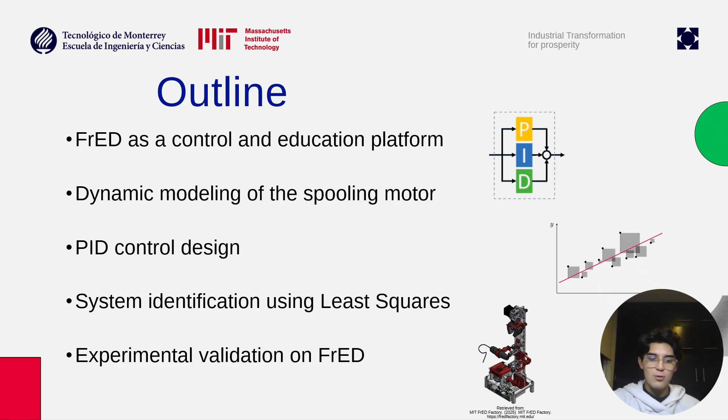So first, let's begin with the introduction section. We're going to revisit some of the topics that we've talked about in the last few hours in the workshop given by my colleague Adriana. So yeah, first we need to ask this question: why is it that we use FrED for learning control? Why is it useful for control?

So FrED, as you may have noticed from this whole summit, is a really special and really creative way of solving a problem, and this is a fiber extrusion device, also known as FrED. FrED is a modular scale manufacturing platform designed to mimic key parts of the optical fiber production. It combines mechanical actuation, thermal processing, sensing, and digital control.

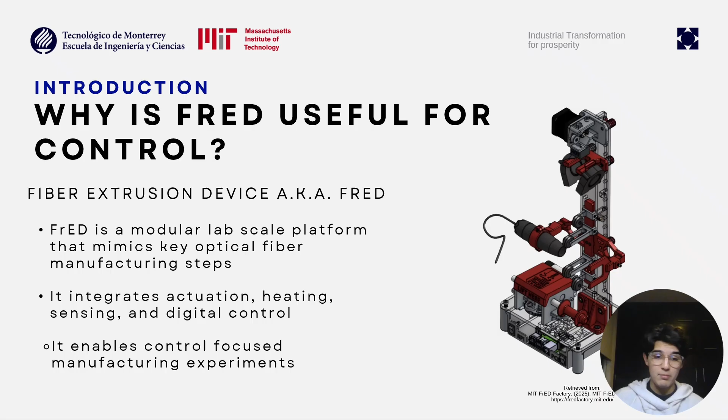This setup lets us, as students or as researchers, study manufacturing processes from a control engineering perspective and build experiments around FrED. We can experiment with the real physical tool instead of just simulating or modeling, in a safe environment without the risk of messing up a large machine that costs a lot of money. It's not only limited to fiber extrusion, but every other machine that implements control in manufacturing.

So let's begin with FrED subsystems. We're going to talk about what composes FrED. Each subsystem has a specific task. The most important thing is that they don't work independently. Instead, they form a coupled system where changing one part directly affects the other.

Starting from the top, we have the extrusion subsystem, which is responsible for heating the polymer, in this case the glue, and feeding the material into the system. Right after that comes the cooling system, which regulates how quickly the material solidifies. And the cooling rate is really important because it influences the physical properties of the fiber.

And next we have the measuring device, which is a high resolution camera that feeds the images into a computer. This computer is charged with a computer vision algorithm to estimate the fiber diameter in real time.

Then we have the spooler subsystem, which uses a DC motor with a gearbox to pull and wind the fiber. By changing the spooling speed, we change the tension applied to the fiber, which directly affects the final diameter. We'll get to that, but this is the reason why we will be implementing a control together in this motor, specifically this subsystem.

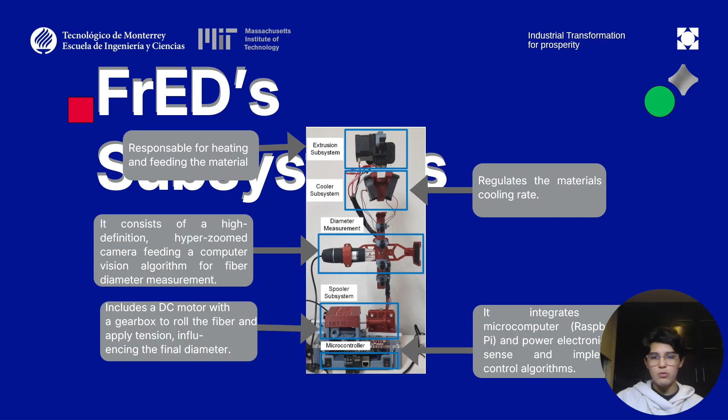Because all of these subsystems interact dynamically, FrED is behaving very much like a real industrial manufacturing process, where multiple physical processes are embedded together, coupled together, and must be controlled simultaneously to ensure a final product quality.

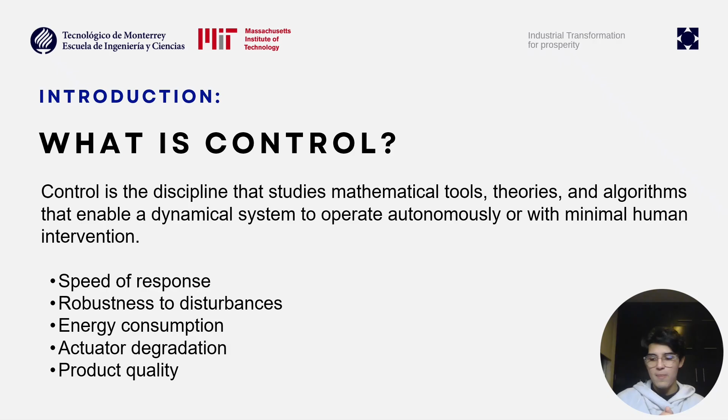All right, now let's formally define what we are talking about. Control is a discipline that studies mathematical tools, theories, and algorithms that enable dynamical systems to operate autonomously or with minimal human intervention. This is one of the most used definitions, and in my opinion, one of the most complete definitions of control, because in real engineering systems, especially in manufacturing, the objectives of control go well beyond just simply reaching a desired value. It's about balancing requirements that compete with each other.

The speed of response, we look for robustness against disturbances. We also want to optimize energy consumption, make our actuators last as long as we possibly can. That's why we control the actuator degradation by taking care of it, and we also ensure product quality. That's why control is not just about reaching a value. It's about making the system perform optimally under real-world constraints.

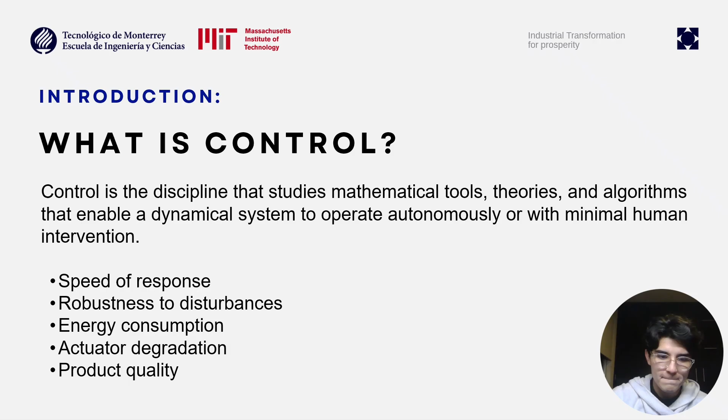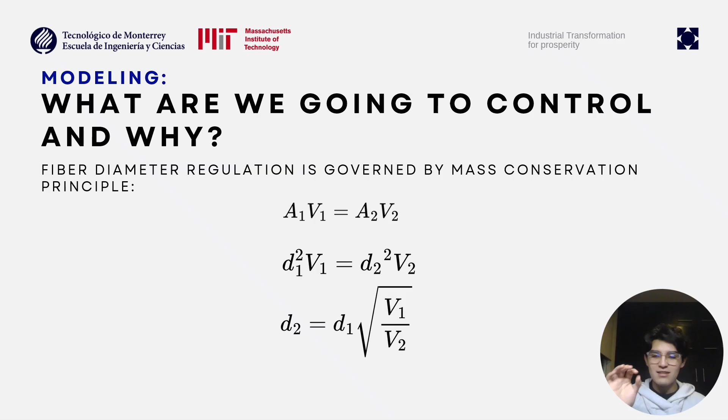And in the concrete case of FrED, control guarantees a stable spooling speed, which, as we've stated before, ensures a constant fiber diameter. That's why we will control this motor today. By regulating variables such as motor speed and heat power, the control system keeps the process stable despite disturbances or variations in maybe material conditions.

This obviously ensures that the fiber is produced with a consistent diameter and quality, which is critical for optical purposes, for the fiber to transmit data accurately, and this makes the manufacturing process robust.

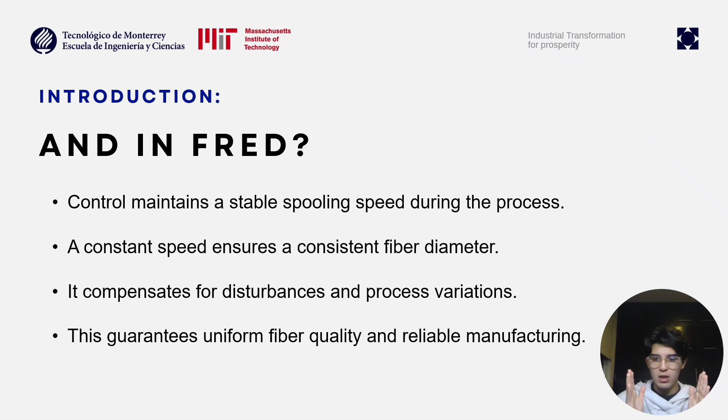Now let's start with the history of control systems. So the first automatic control system was developed over 2000 years ago. The first control device on record is thought to be the ancient water clock, the Clepsydra, in Alexandria, Egypt, around the 3rd century before Christ.

How did this system work? Well, it allowed water to flow out of a container through a hole at a roughly constant rate, and the level of water indicated how much time had passed. However, this system was considered to be an open loop system because it had no feedback mechanism. This means if the flow rate changed because of the pressure or temperature, the system would not adjust or correct itself.

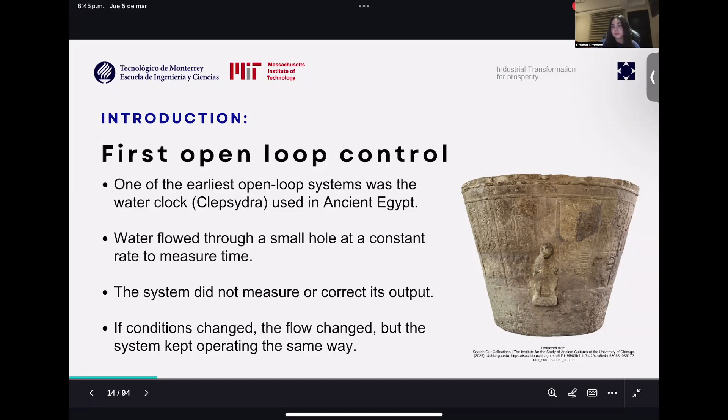Now let's see a video. What did you observe in the video? What is that?

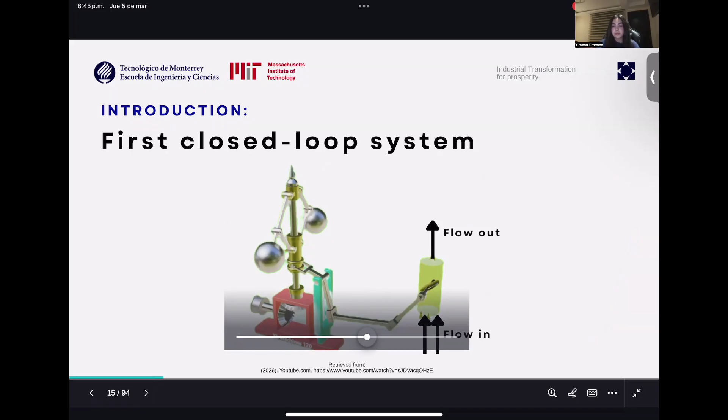So this is the first closed loop system. It was built during the Industrial Revolution in the 18th century. And during this time, steam engines were the primary power source in factories, but they had a huge practical problem. Every time the load varied, the engine's rotational speed changed as well. Those fluctuations could reduce efficiency, damage the machinery, or even cause dangerous failures.

So, in order to solve this, the Watt's centrifugal governor was invented, and this machine could actually react to the changes in the engine's rotational speed, changes that human operators were too slow to handle.

But how did it work? As we observed from the video, there's a motor, and the motor rotates. Then there's an axis that rotates as well. And in this axis, there are two spheres. When the motor's speed increases, the spheres' separation will start to increase. The spheres will start separating.

And this separation actually causes the valve to move. The movement in the valve based on the measured speed allowed the governor to maintain a stable operation without the need of human intervention because it allowed it to release steam. And this machine actually introduced a core idea that is used in modern control, which is feedback. And feedback is a way of correcting the input by comparing the desired output with the actual output.

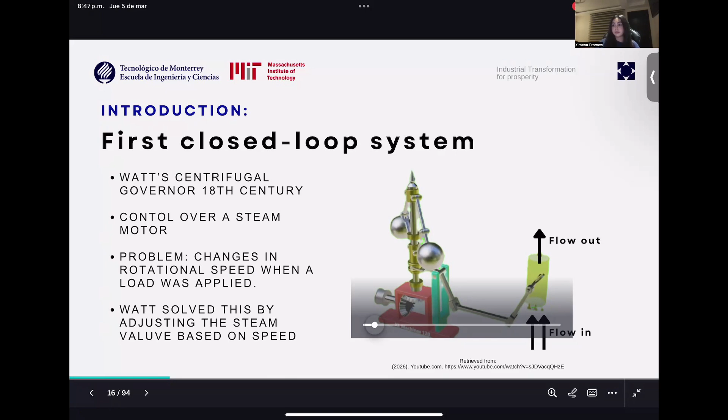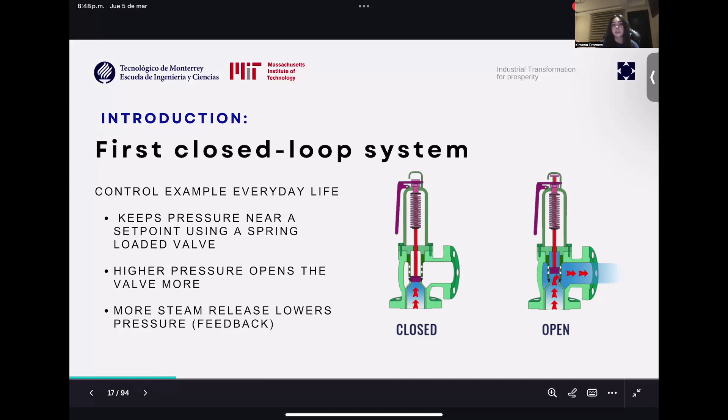Let's look at a more familiar example. What about the pressure valve on a pressure cooker? So the pressure cooker keeps the pressure near a set point using a spring-loaded valve. So as the pressure increases, the valve opens more, releases the steam, and as a result, the pressure drops. This is feedback in action.

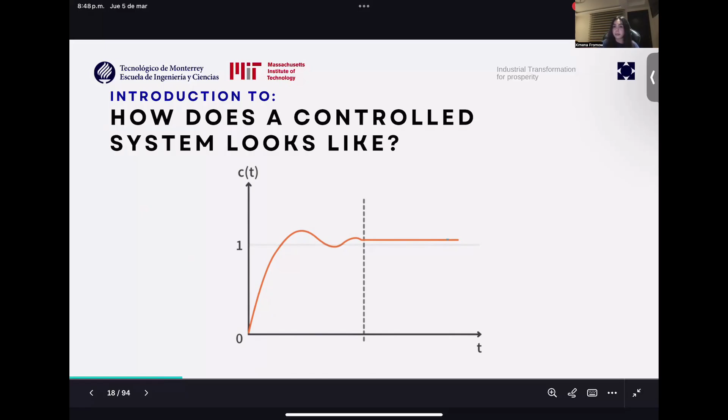Now, here is a recap from the previous workshop. Who can come to the board and identify the key points on this characteristic control graph? So first, we can observe that there is a desired output, which, as the name suggests, is what we actually want to obtain. Then there is the actual output, and as the name suggests again, is what we got.

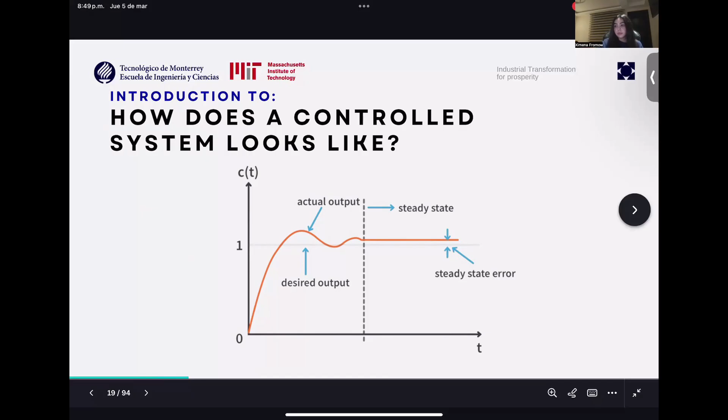Then there's a steady state, the point in which the system will stabilize, and then there's the steady state error, which is the gap between the value of the output when the system was stabilized and the desired output. We can observe as well rise time. And the rise time is the time it takes the system to get close to the desired output.

There's also the peak time. And the peak time is the time it takes the system to get to the highest point in the graph. So in this case, it is after the overshoot. But what is the overshoot? The overshoot is how much the system will surpass the desired output. So it's the gap that is created. And that's it for now.

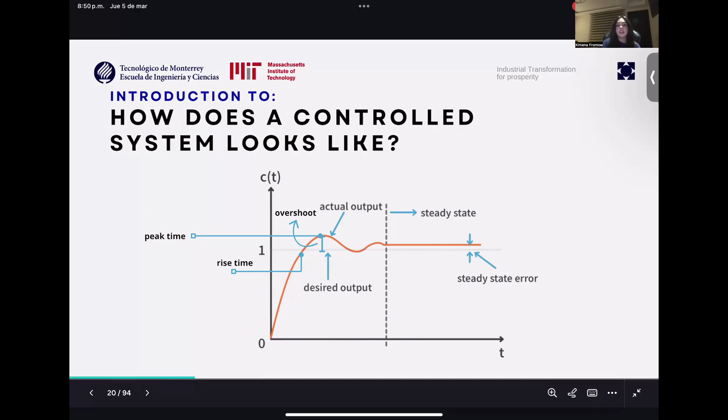First, what exactly is damping? So damping is a dissipation of energy in an oscillating system. A good example to visualize this is when you pull a spring and then release it. If there is no damping, the spring will continue to oscillate forever. But with damping, the spring will eventually come to a stop. That is damping.

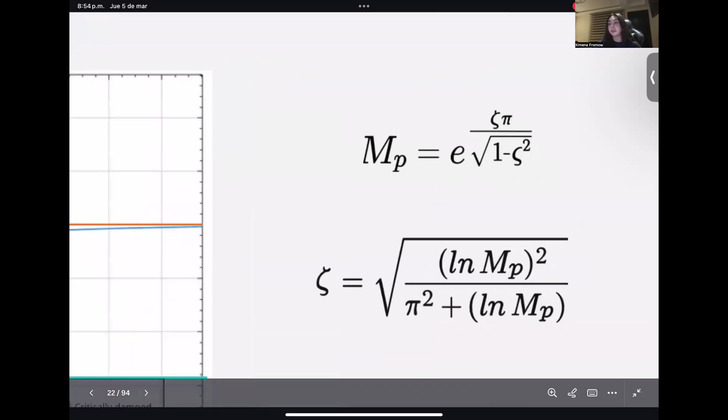Then let's see the equations. So we have Mp. Mp is the maximum overshoot. And as we can see, this equation is only based on zeta, so it is controlled by zeta. But what is zeta? Zeta is a silly looking Greek letter, and this Greek letter is actually the damping ratio. So the damping ratio is like the division, the comparison of the...

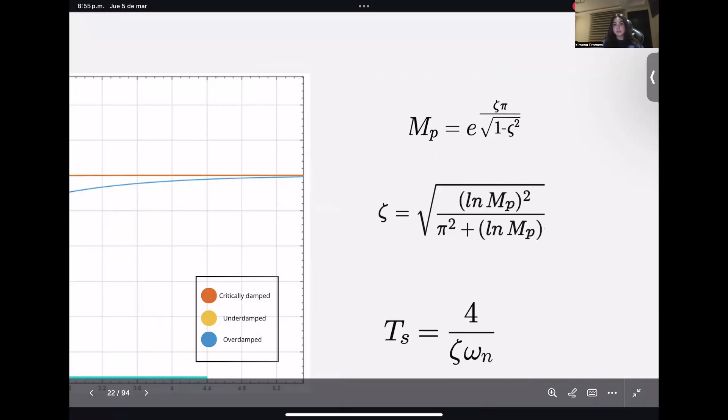Now, what about this image? We can observe three different control responses. Which one is overdamped, which one is critically damped, and which one is underdamped?

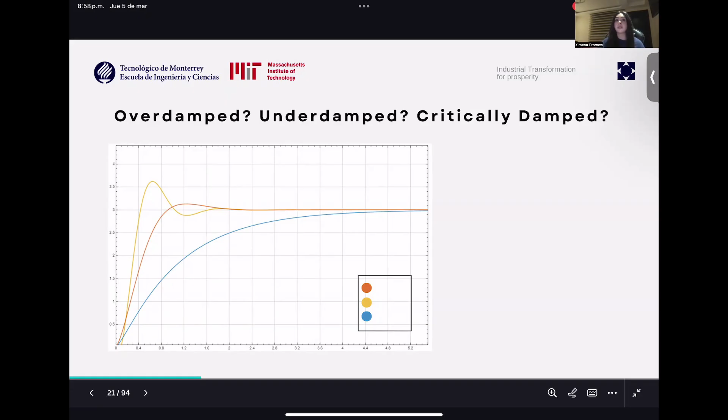First, we need to define what is damping. Damping is the dissipation of energy in an oscillating system. A good example is a spring. If you take a spring, pull it and then release it, without damping, the spring will continue to oscillate forever. But with damping, it will eventually come to a stop. That is damping.

Now that we know that, we can start looking into more important concepts repeated throughout this workshop. The overshoot occurs when the system exceeds the set point before settling. It is clearly visible in the underdamped, the yellow one. It's caused by aggressive control action or low damping. As the name suggests, underdamping has low damping, and this response is characterized by being really quick, but having an overshoot and oscillating before actually settling.

So what are oscillations? Oscillations happen when the controller makes the output dance back and forth across the reference value without ever settling on it.

Now that we know what underdamp is, we can get what overdamp is. Overdamp is the exact opposite of underdamp. Overdamp means it's a system with a lot of damping, highly damped. In this type of system, the response will be slower, but the system will be more stable. The response will be more stable. There will be no overshoot and no oscillations.

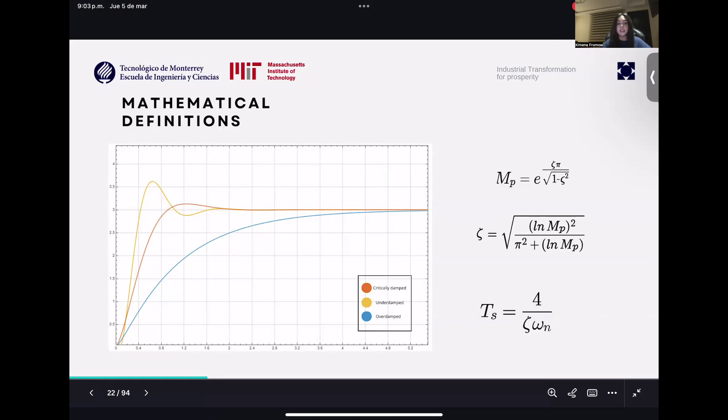Here's another key concept you can use to identify which response your system will have. If zeta is smaller than 1, you will have an underdamped system, characterized by a lot of oscillation and overshoot, but a quick response. If zeta is equal to 1, you will have the critical damp, the optimal, ideal type of system. Finally, if zeta is bigger than 1, you have an overdamp system, which is slow. It has a slow response, but is way more stable than the underdamp.

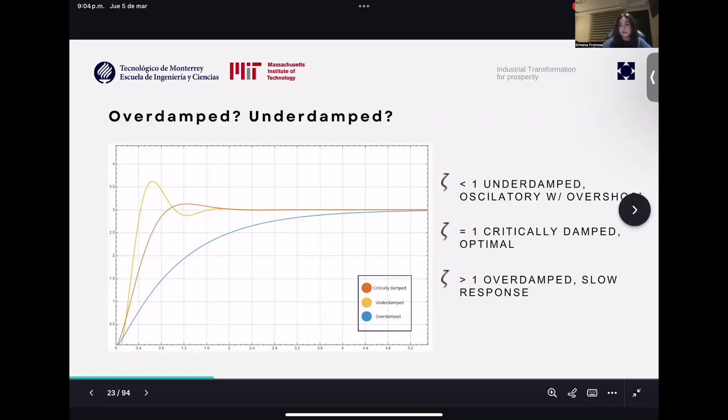But why are they important? Why do I need to know which type of response, which type of system I have? Well, in manufacturing applications such as FrED, excessive overshoot may lead to diameter fluctuations, while excessive damping may slow the correction of disturbances. Therefore, this type of second order analysis is very important to balance performance and robustness.

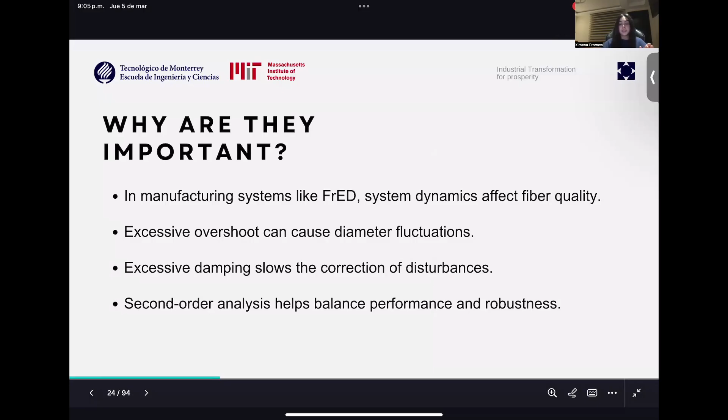So now that we know this, we'll move on to implementing the first code we have in MATLAB. Please start by opening MATLAB.

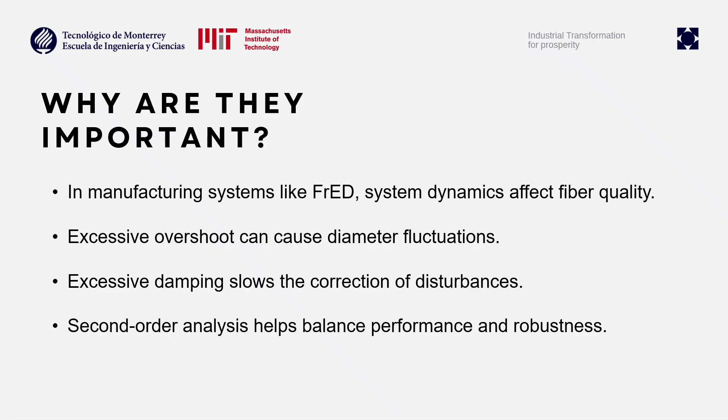Now let's briefly talk about different control techniques. Some of the most common closed loop control techniques are the on-off control, which is the simplest. It fully switches the actuator on and off depending on whether the error is positive or negative, like the thermostat in your home. Fuzzy logic control uses linguistic rules instead of precise equations to control systems with uncertainty or nonlinear behavior.

Adaptive control automatically adjusts its parameters in real time to maintain performance when the dynamics of the system change a lot. And finally, model predictive control predicts the future system behavior using a model and optimizes control actions over time.

And the star of today's show, the PID controller. It's a linear feedback law composed of three actions. Proportional action, which reacts directly to the current error. If you have a large error, you will have a large response to it.

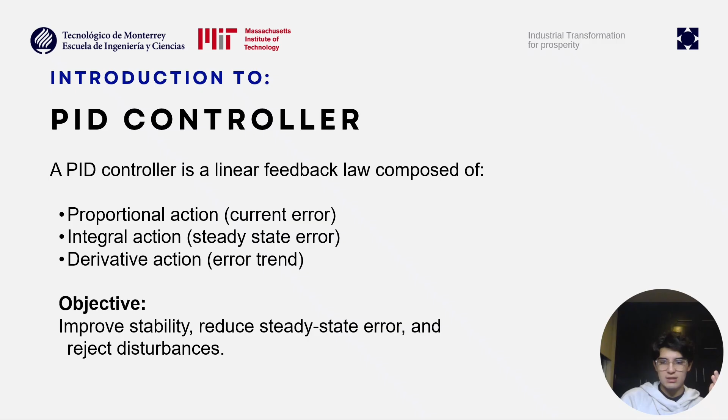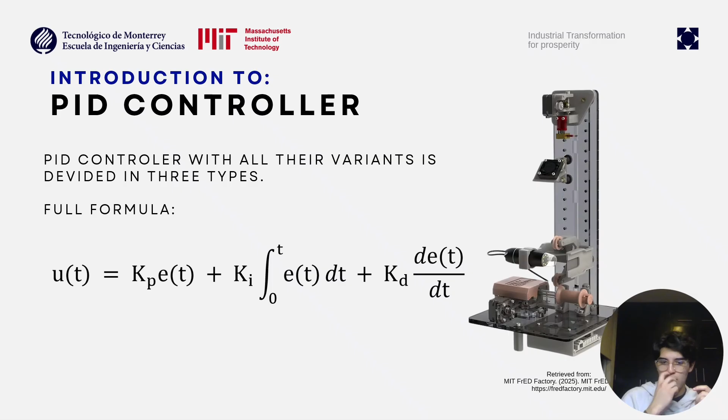Here we see the complete mathematical representation of the PID controller. It comes in three variants depending on which combination of actions is used. It could be P, PI, PD in some cases, or fully PID, which is the combination of the three: the proportional, integral, and derivative part.

So just a reminder of the table that we examined before with Adrian, and a reminder of what I said before: the proportional acts on the current error, the integral on the steady state error, and the derivative upon the error's trend.

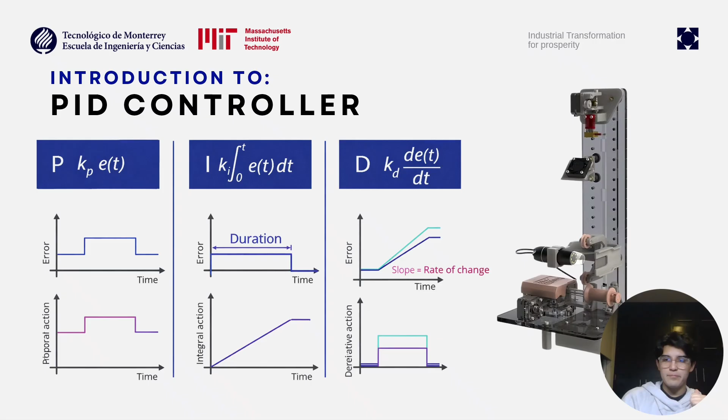When we represent the PID in the Laplace domain, we get a transfer function, which we will get to in a few slides. This representation allows us to apply powerful mathematical tools for designing and analyzing the closed-loop system we will be implementing on our motor.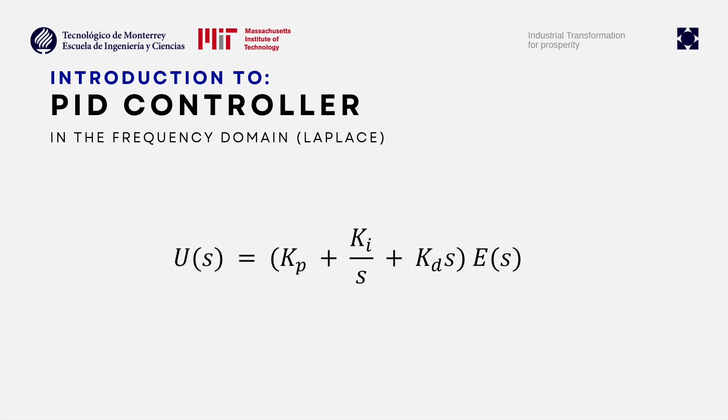Before applying our controller to the motor, we need to understand how the controller actually influences the physical system. In control theory, we compute a control signal called U of T. However, this signal is only a mathematical command. To transform this command into real electrical energy delivered to the motor, we rely on power electronics.

Power electronics is a field of electrical engineering concerned with the conversion, control, and efficient regulation of electrical power using semiconductor switching devices. In many systems, the available electrical power cannot be applied directly to the load. Instead, it must be converted, conditioned, and regulated. This is done through different types of power electronic converters.

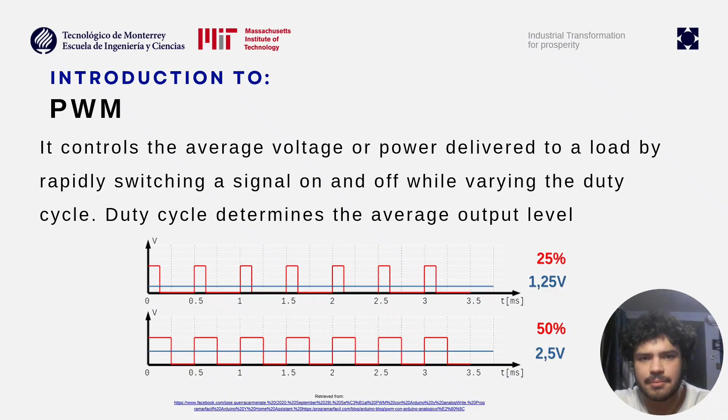PID controller pros and cons. Like any tool, like anything in the world, PID has its strengths and its weaknesses.

Some of the advantages are that it's simple and intuitive, easy to understand, implement, and tune compared to advanced methods. It is widely proven in industry. It works reliably for a wide range of processes, from manufacturing fiber optics to even drones—everything that could require control, PID might work with it. It's the most used controller in the industry, and it's really easy to tune, as I've said before.

Some of the disadvantages are that it has no explicit prediction. It only reacts to errors because it's a reactive control—something needs to happen for the controller to react. Some definitions say the derivative part could be seen as a predictor of the future, but that is actually wrong. You won't find that definition, to the best of my knowledge, in any serious control book. So we won't even say that it predicts the future. And some poorly chosen gains can cause overshoot, oscillations, and instability.

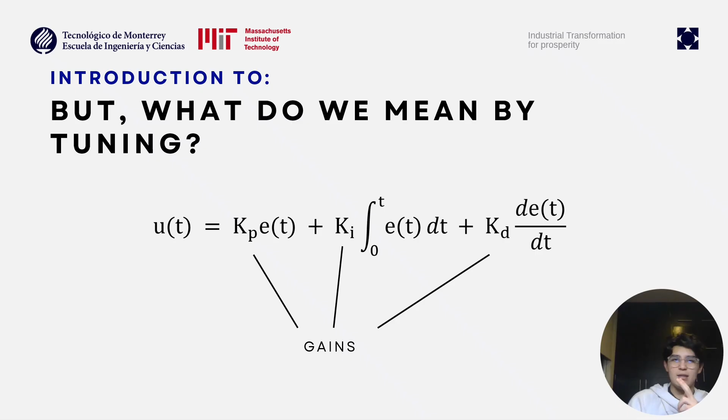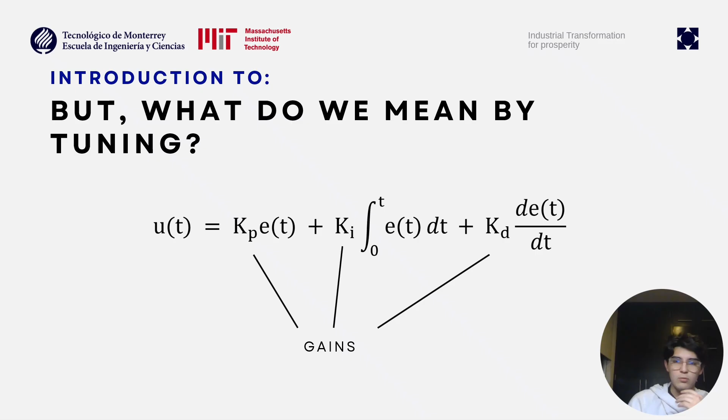There are a wide variety of tuning methods, and we are going to present you with an analytical one. Just keep in mind that the goal of the system is to respond quickly, accurately, and stably to any given reference. Proper tuning balances performance metrics like overshoot, settling time, and steady state error, according to the application requirements.

We'll wait for that to happen, and first we will try setting the gains in the FrED. So some of you give me a value—I ask for a PID gain estimation from the audience, just to show how the FrED will respond to these random values given by the public. And we'll get to the modeling part, discussed by my colleague.

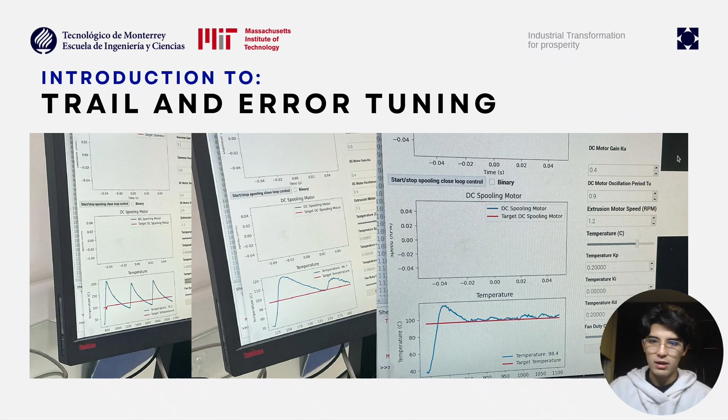Now, what is a model? A model is an abstraction constructed to answer specific engineering questions. In manufacturing, there are common modeling objectives such as prediction, where engineers try to forecast process behaviors under changes in inputs, disturbances, or set points. Then there's analysis, where we study stability, sensitivity, and performance limitations given by physics.

Then we have control design, where we design feedback control laws to regulate variables and product quality. Finally, we have optimization, where we trade off quality and energy consumption under certain constraints.

But why is it important? Why are we going to model? We seek a model that is adequate for a defined purpose. In control, model adequacy typically means capturing dominant dynamics in the frequency band relevant to regulation and tracking, with an explicit representation of uncertainty when needed. These dominant dynamics could be inputs, outputs, states, and disturbances.

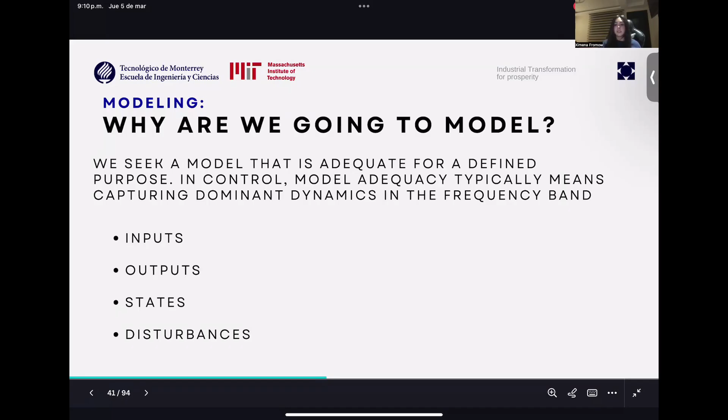Now, transfer functions. What are transfer functions? A transfer function is a representation of a system through a linear, time-invariant differential equation. Mathematically, we can observe it as the Laplace transform of the output over the Laplace transform of the input.

The Laplace transform is an integral transform that changes a time domain function into a complex frequency domain function. So we need all initial conditions to be set to 0. Why? It means the motor starts from rest with no stored current and no initial angular velocity.

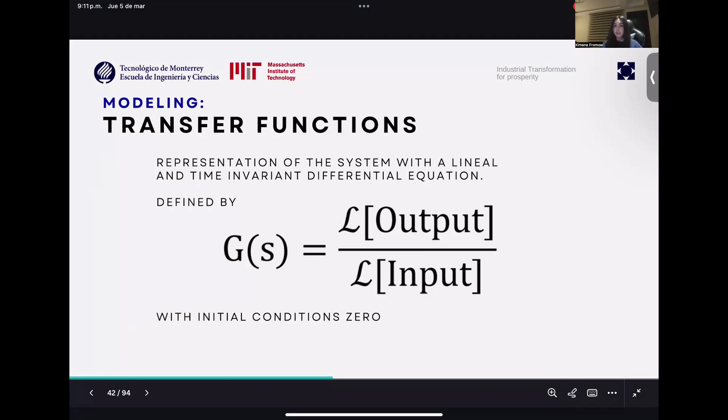You can actually visualize a transfer function as how a system transforms an input into an output without telling us exactly what happens inside. So you can see it as a black box. These transfer functions are only implemented when modeling SISO systems, which means a single input, single output system.

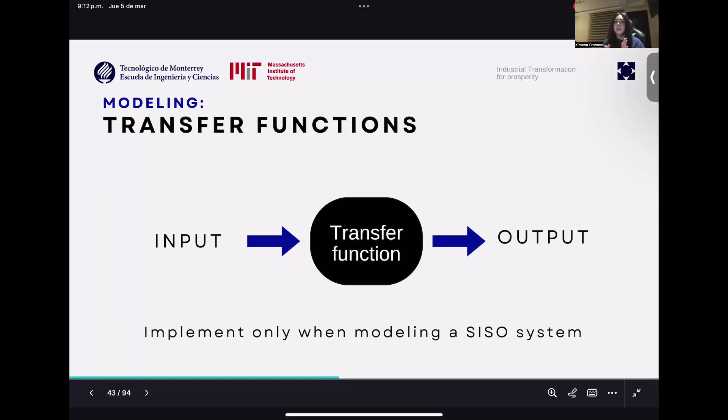Now let's talk about the transfer function of our motor. In this system the manipulated input is the voltage applied to the motor, while the measured output is the angular velocity of the spooler. The transfer function we seek to identify captures the dynamic relationship between these two variables. This is particularly relevant in FrED because the spooler speed has a direct effect on fiber tension, which in turn plays a major role in determining the final fiber diameter.

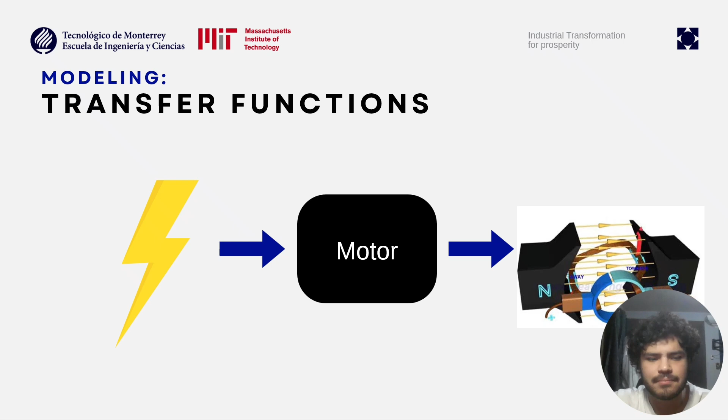Before deriving the transfer function, we first need to define the main variables and parameters involved in our DC motor. First, the input voltage, or V(t), applied to the motor. In our case, this voltage comes from the motor driver as a PWM command, which effectively controls the electrical power delivered to the motor. Next, omega(t) represents the angular velocity of the spooler, which is the rotational speed of the motor shaft. This is typically measured in radians per second or RPM, and it is the main output variable of the system because it directly affects the fiber winding process.

Then we have T(t), which is the torque generated by the motor. Torque is the rotational force responsible for accelerating the rotor and maintaining its motion. The variable I(t) represents the armature current, which is the electrical current flowing through the motor windings and is directly related to the torque produced by the motor, as we will see in some moments.

Next, we have V_EMF, or the back electromotive force. This is a voltage generated by the motor when it rotates. According to electromagnetic induction, the rotation of a motor in a magnetic field induces a voltage that opposes the applied voltage. This effect naturally limits the motor speed as it spins faster.

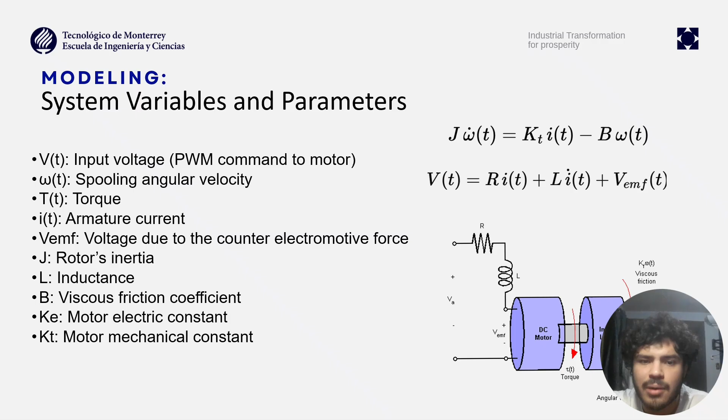The output of the system is the angular velocity, which is exactly the variable we want to control in our process. A DC machine converts electrical energy into mechanical energy through electromagnetic interactions. When a voltage is applied to the armature, current flows through the windings according to Ohm's law.

This current generates a magnetic field, and the interaction between the armature current and the magnetic field of the permanent magnets produces a force described by the Lorentz force law. This force results in a torque that causes the rotor to rotate. As the rotor spins, the changing magnetic flux through the armature conductors induces a voltage according to Faraday's law of electromagnetic induction. This induced voltage opposes the applied voltage and is what we refer to as back electromotive force.

An important point to take into account is that a DC machine is electromechanically reversible. But what does this mean? This means that it can operate not only as a motor, but it can also convert mechanical energy into electrical energy, giving it also the function of a generator. So this is precisely why the back EMF is so important in the motor model, because it reflects the generator-like behavior that naturally appears when the rotor is spinning.

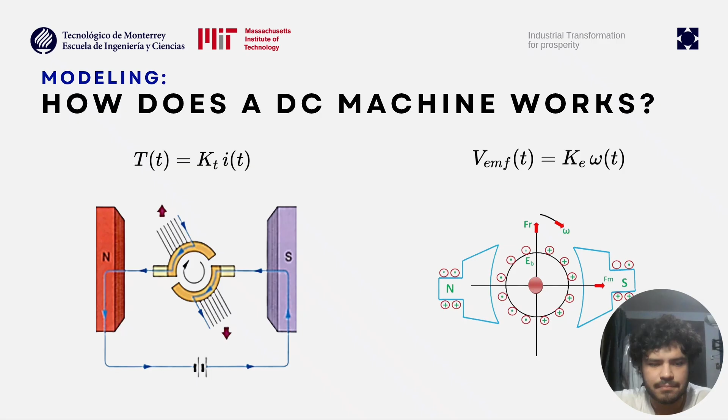Now that we understand the physical behavior of the DC motor, we can begin describing it mathematically. We start from the electrical equation of the armature circuit that we have on the top. This equation comes directly from Kirchhoff's voltage law. It states that the applied voltage must equal the sum of the voltage drops in a circuit.

The first term, R I, represents the voltage drop across the armature resistance. The second term represents the voltage associated with inductance of the windings, which accounts for the fact that the current cannot change instantaneously. The last term is the back electromotive force, which is generated by the rotation of the motor and opposes the applied voltage.

To analyze the system more easily, we will transform it into the Laplace domain. The Laplace transform converts differential equations into algebraic equations, which makes it much easier for us to manipulate them and to get our transfer functions. We applied the Laplace transform to our variables, and we can see the equation that now describes the electrical dynamics of the motor, but now in the Laplace domain. Now we will combine the electrical equation with the mechanical equation of the motor in the next steps.

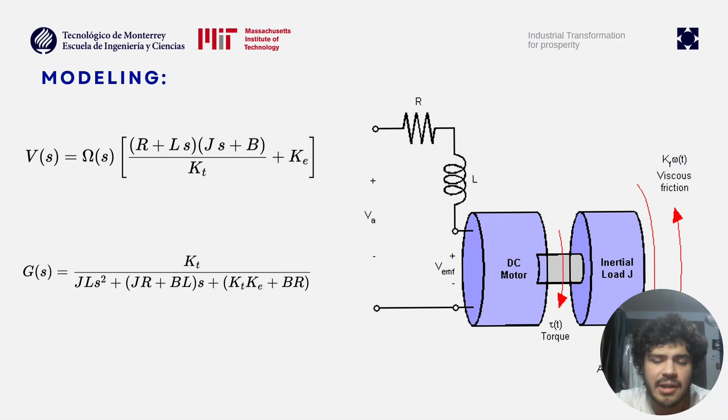Finally, we rearrange that expression to obtain the transfer function, as we can see on the image. So there, where it says G(s), it actually means capital Omega in the S domain over capital V, that is voltage, in the S domain, which represents the dynamic model of the DC motor.

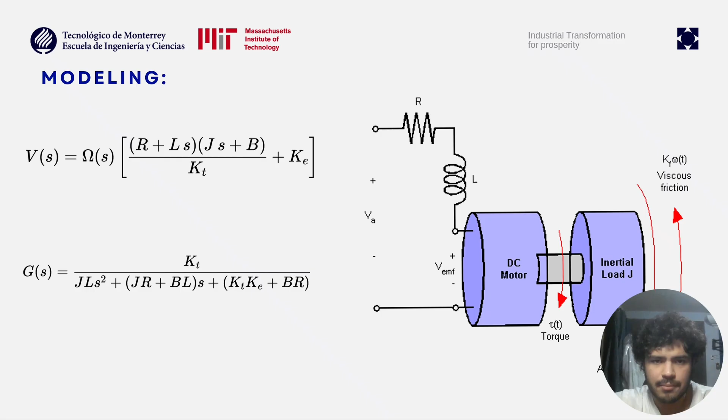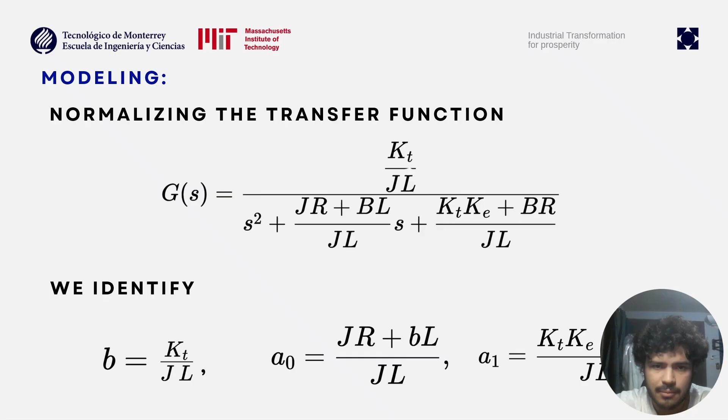So now we have to normalize the transfer function. But what does this mean? If you remember, in the last part of the equation, we had some coefficients besides our S variables. But what does it mean to normalize? We actually have to divide so that the S squared coefficient is 1. So here we can identify our parameters, which are B, A0, and A1. And let's go to the other slide.

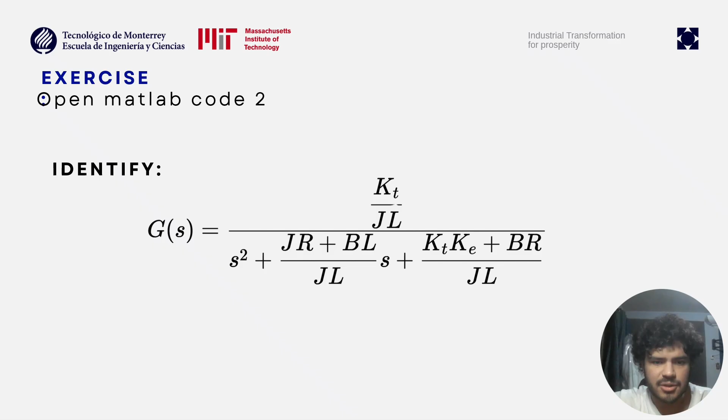Now here we will tell the students that it's their turn, and they will have to use the parameters given on the slide to find the system's transfer function in a MATLAB code that is already made, and also to identify the values.

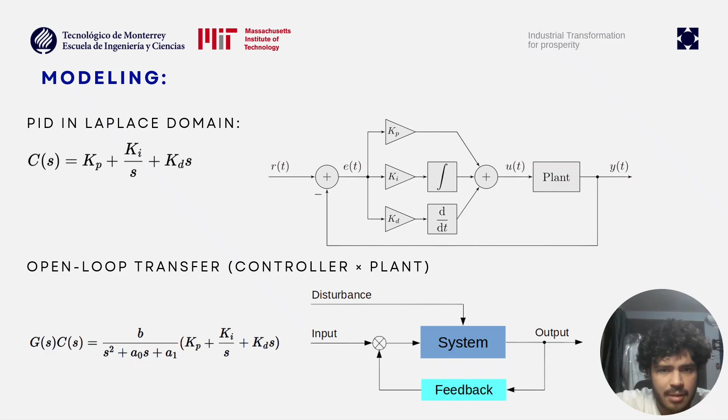So the open loop transfer function is simply the product of the controller transfer function and the plant transfer function. So mathematically, we write it as if they were multiplying. So G(s) in this case is our motor dynamics, and C(s) is the PID controller. This open loop representation is important because it allows us to analyze stability, system poles, and controller design before closing the feedback loop.

Now that we have both the plant transfer function and the PID controller, we can combine them. First, we have already computed the open loop transfer function, which is simply the product of the plant and the controller. And after multiplying both expressions, we get the combined dynamics of the controller and the motor before closing the feedback loop. And how do we close that feedback loop?

So we use the standard formula for the closed loop transfer function of a feedback system, which is the one stated in the presentation. This equation describes how the system output responds to the reference input when feedback is applied. The denominator term, 1 plus G(s) times C(s), captures the effect of the feedback loop on the system dynamics. After substituting the open loop expression and simplifying, we obtain the final closed loop transfer function, which is the one at the bottom. This form is very important because it expresses the system as a polynomial in S.

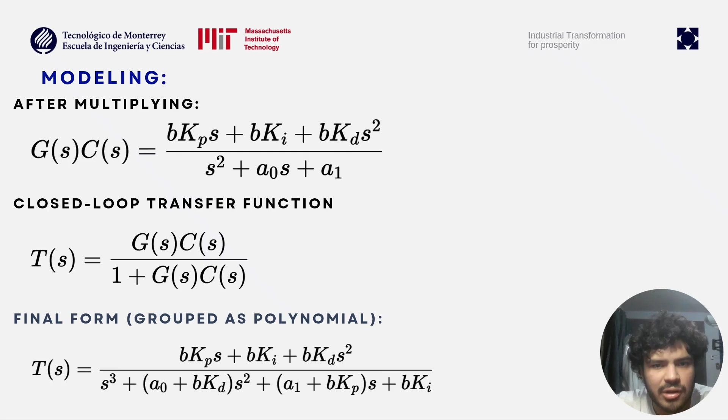From this polynomial, we can analyze the system poles, which determine the stability and dynamic behavior of the system. More importantly, we can see directly how the controller gains, Kp, Ki, and Kd, modify the coefficients of the characteristic equation. This is also what allows us to tune the PID controller and shape the dynamic response of the motor system.

Now that we have the closed loop transfer function, we can use it to design the PID gains. The denominator of the closed loop transfer function determines the system dynamics because its roots correspond to the closed loop poles of the system. From our previous derivation, the denominator polynomial is the one stated at the top. We can see that the polynomial depends directly on the PID gains.

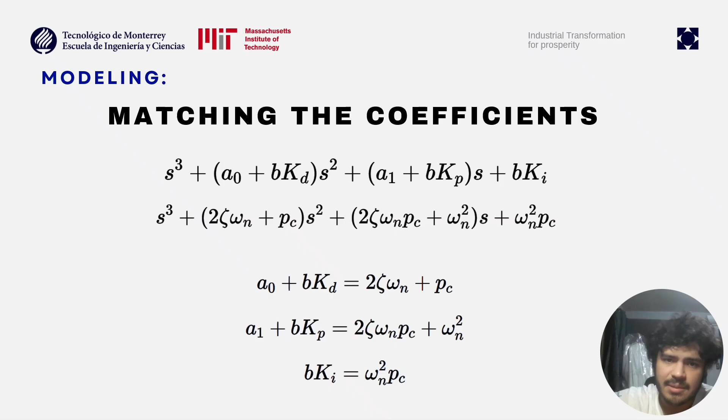But instead of choosing these gains arbitrarily, we specify the desired dynamic behavior of the system. To do this, we define a desired characteristic polynomial based on the parameters that describe the system response, such as natural frequency and an additional pole. This desired polynomial is the one below the one that we discussed earlier. The idea is simple. If two polynomials are equal, then their coefficients must also be equal. So we match the coefficients in order to obtain the solutions, which are our final PID gains.

And well, these expressions are very useful because they allow us to compute the controller gains analytically based on the desired system dynamics defined by the parameters that we've discussed earlier. So instead of tuning the controller purely on trial and error, we can select the desired response characteristics and directly calculate the PID parameters that achieve the behavior.

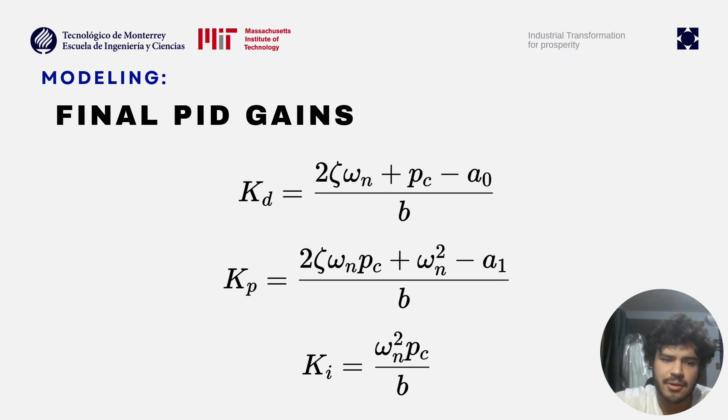There's a problem. To compute these gains, we need to know the physical parameters of the motor: inertia, viscous friction, the constants, inductance, resistance, and in many cases, we simply cannot open the motor to measure them directly.

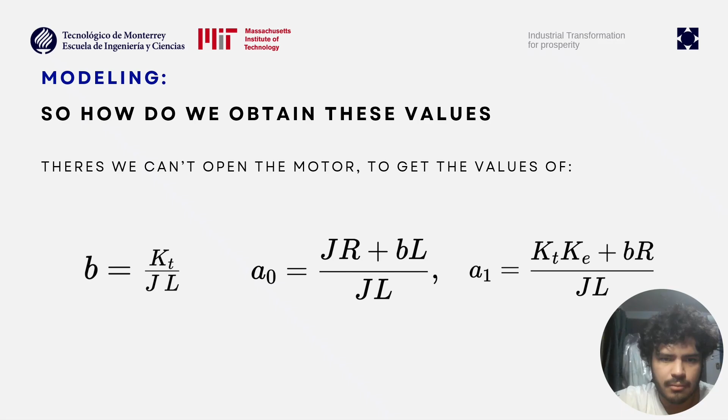But before moving into system identification, it is important to discuss briefly stability and instability in control systems. A system is considered to be stable if its output remains bounded for bounded inputs. In other words, if we apply a finite input to the system, the output should not grow without limit. In practical terms, stability determines whether the system behaves in a predictable and controlled manner.

In the context of FrED, stability is especially important because the variable we're controlling is the spooler speed, which directly affects the fiber diameter. If the system becomes unstable, the spool speed may oscillate or grow uncontrollably. This would lead to fluctuations in fiber tension and ultimately produce an irregular fiber diameter or break it. On the other hand, a stable system responds smoothly to disturbances and corrections, allowing the spooler to maintain a consistent speed and ensuring uniform fiber winding.

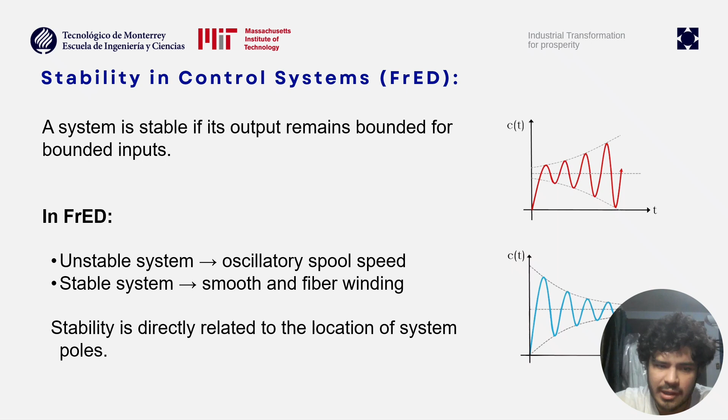So we will now analyze the location of the system poles in a complex plane. The poles of a system are the roots of the denominator of the transfer function, and they determine how the system responds over time. If the poles have a negative real part, they lie in the left half of the complex plane, and the system response decays over time. This corresponds to stable behavior.

This is where control design becomes important, because one of the main roles of the PID controller is to modify the system dynamics by shifting the location of these poles, by properly choosing the gains Kp, Ki, and Kd. This ensures that the system responds smoothly and avoids oscillations or instability.

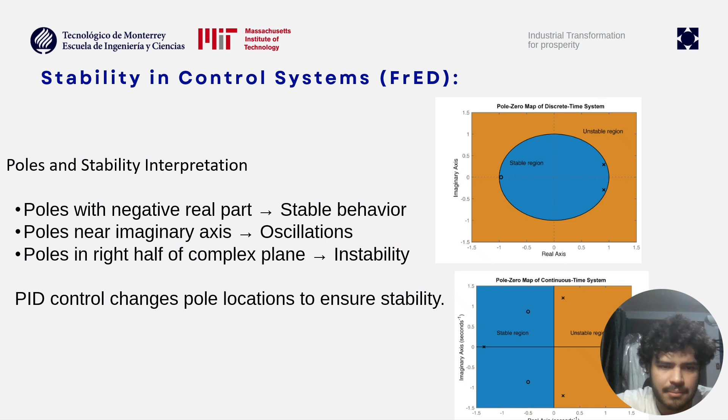Since we cannot directly measure the internal parts of the motor, we use a different approach known as system identification, which consists in estimating the mathematical model of a system using experimental input and output data. One of the most commonly used techniques for this purpose is the least squares method, which is a mathematical method used to estimate unknown parameters by minimizing the squared error between two quantities.

The first quantity is the measured output of the real system, and the second is the output predicted by the mathematical model. The idea is to adjust the model parameters so that the predicted response of the model is as close as possible to the measured response of the real system. By minimizing the squared error between these two signals, we obtain the best parameter estimates that explain the observed data.

In the context of FrED, this approach allows us to estimate the motor parameters and identify the system dynamics without physically accessing the internal components of the motor. So instead, we excite the system with known inputs, measure the resulting outputs, and then use least squares to determine the parameters that best fit the observed behavior.

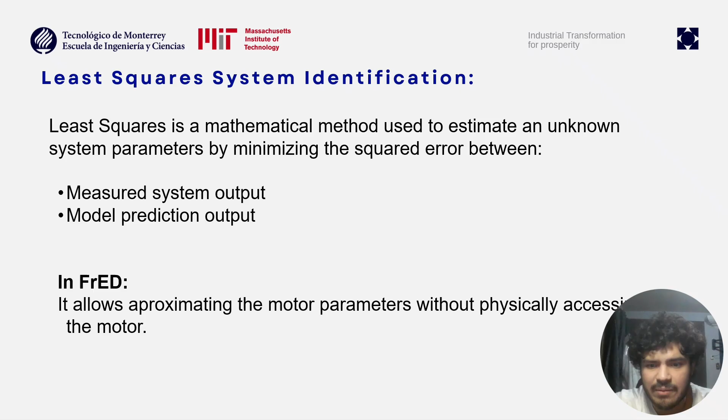The vector y contains the measured output data of the system. The matrix X is called the regression matrix. It contains the known terms constructed from the input and output data of the system. And the vector beta contains the unknown parameters that we want to estimate numerically.

So the goal of least squares is to find the parameter vector that makes the model prediction as close as possible to the measured output. In other words, we choose the parameters that minimize the squared error between the measured data and the model prediction.

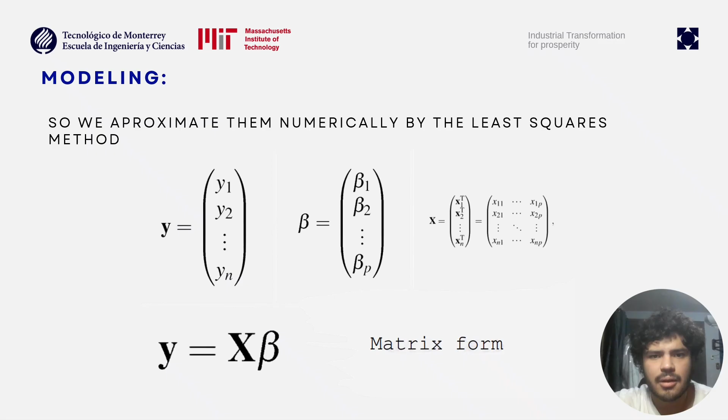The least squares formulation can also be represented as an optimization problem. Recall what our model was. However, in practice the model is not perfectly matched to the data, because the measurements contain noise and the model is only an approximation of the real system. So instead of forcing an equality, we define an error term.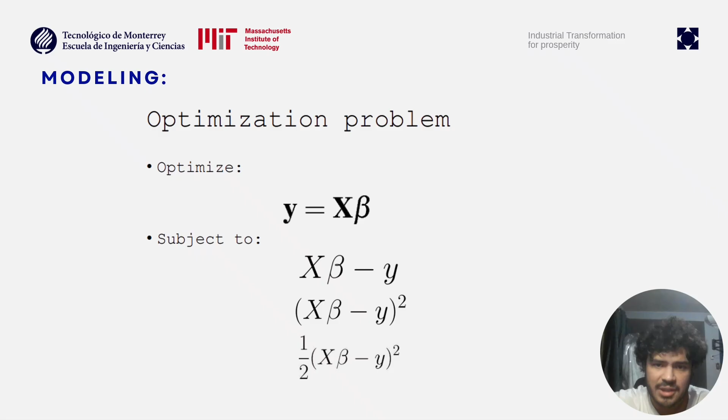So now we solve this optimization using matrix algebra. Recall that our objective was to minimize the squared error between the model prediction and the measured data. So we have our cost function. Using matrix notation, this expression can be written more precisely as the product between the error transposed and that same error.

This represents the squared Euclidean norm of the error vector, and it defines the cost function that we want to minimize. So we denote this function as J of beta. So the problem becomes: find the parameter vector beta that minimizes the function J of beta.

To find the minimum of this function, we compute the gradient of the cost function with respect to the parameter vector beta. The optimal solution occurs when the gradient is equal to 0. This condition means that we are at a stationary point of the cost function, which corresponds to the minimum error between the model and the measured data. Solving this equation leads to the normal equations, which provide the analytical solution for the parameter estimates.

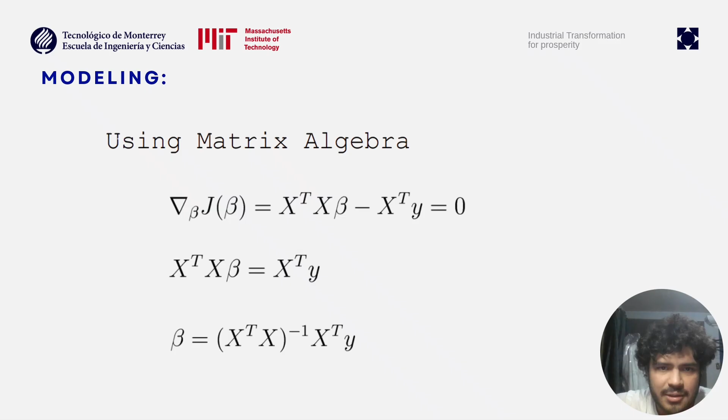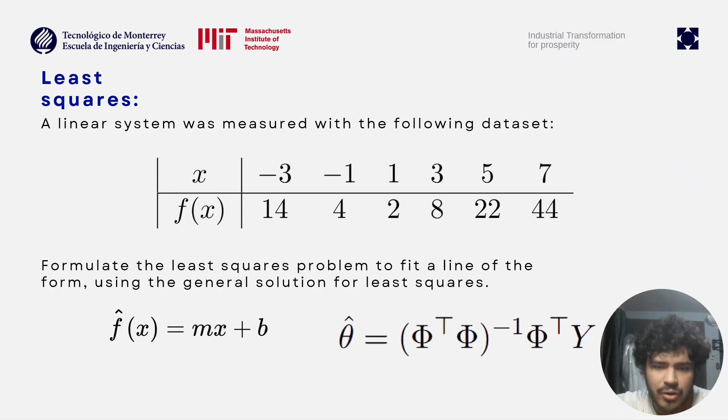Now let's do some hands-on exercises, where we will give you a least squares MATLAB code for you to calculate the following datasets.

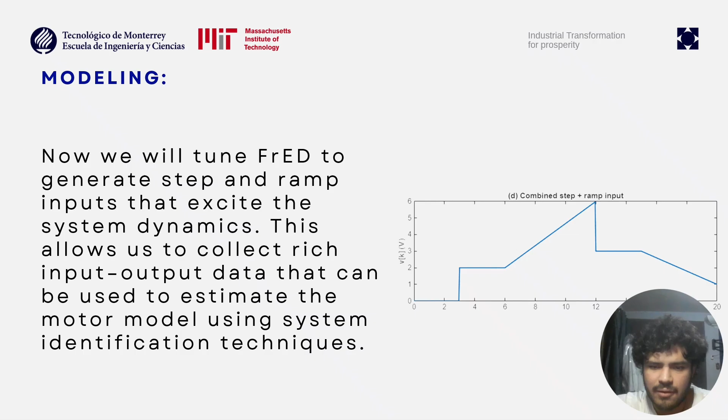And that would be the finish of the workshop part 1, and part 2 will be given by my colleague Patricio Gomez, who will have us exciting the FrED with inputs to get the datasets and doing what we've been doing. First cleaning, because we don't want missing values, outliers, or noise, because we want to have a good system identification.

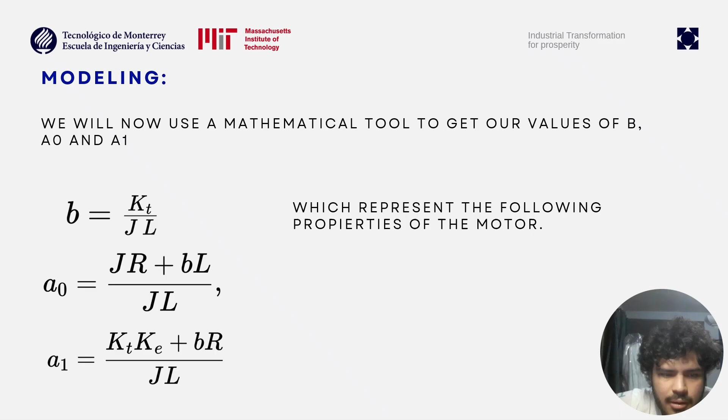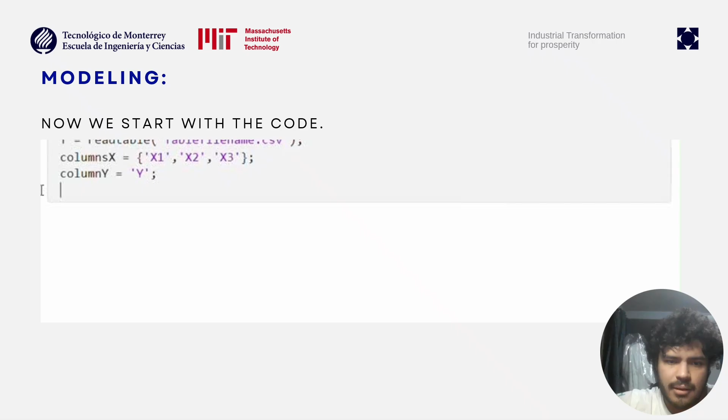And now we will use code to get our values of B, A0, and A1. This will be given in a MATLAB code, and then we will start making the code. After we run it and get our transfer function, we will go to Simulink and start making our own block diagram program, which, as I said, will be given by Pato, to finally compare the graphs in MATLAB and Simulink with the real experimentation in FrED.